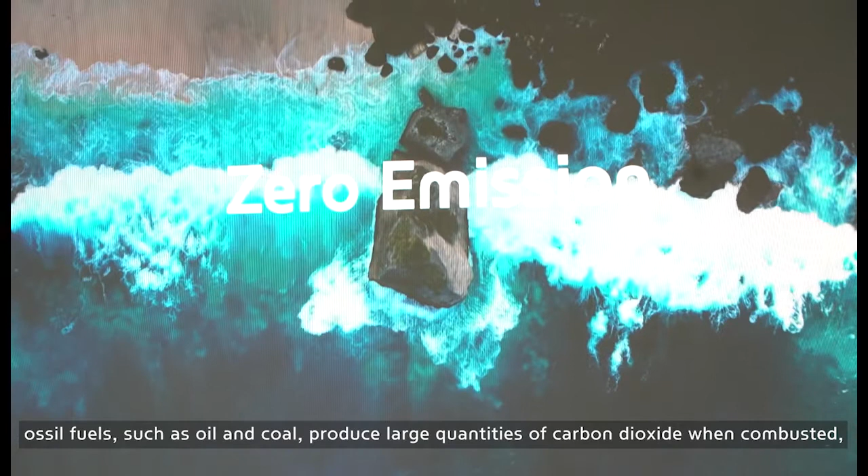For starters, hydrogen is eco-friendly. Fossil fuels such as oil and coal produce large quantities of carbon dioxide when combusted, which contributes to global warming. But hydrogen makes water when combined with oxygen. There is no emissions, and therefore no pollution involved in the process.

Also, it saves a lot of money. Hydrogen trains can operate without overhead power cables, so you can save costs associated with building and maintaining power supply infrastructure.

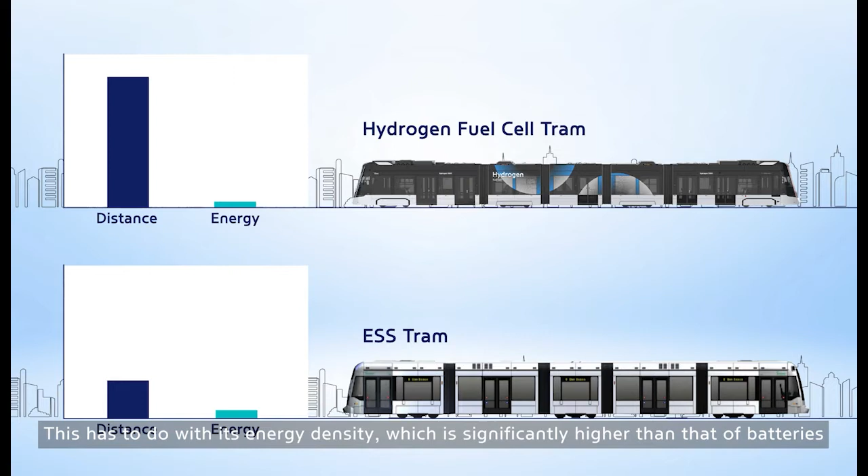In addition, hydrogen is an energy source that can be used in a long-term and large scale. This has to do with its energy density, which is significantly higher than that of batteries. In fact, hydrogen is the only viable option for the rail industry, which requires an independent energy source for high volume movements over a long period of time.

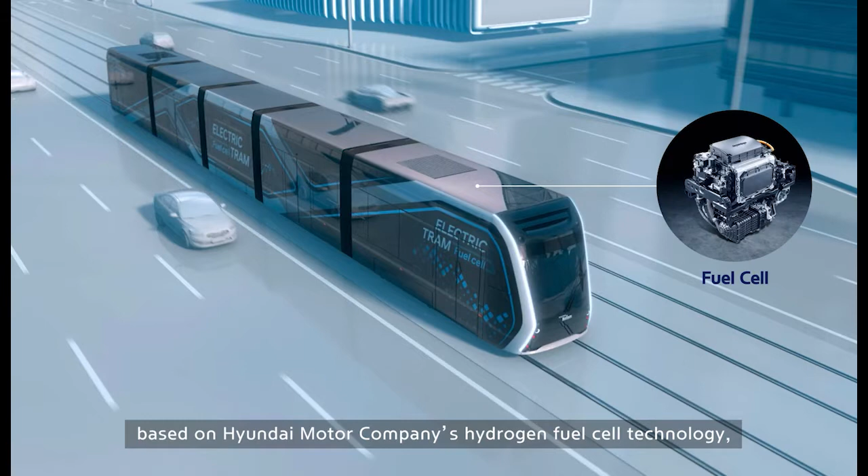Driven by this benefit and the green energy trend, countries with advanced rail systems are rushing to introduce hydrogen trains. Against this background, in January 2019, Hyundai Rotem took on a new challenge to usher in a so-called hydrogen society. We developed a hybrid fuel cell battery combination based on Hyundai Motor Company's hydrogen fuel cell technologies. We installed this system on a prototype tram to demonstrate its feasibility and had its performance verified through a driving test.

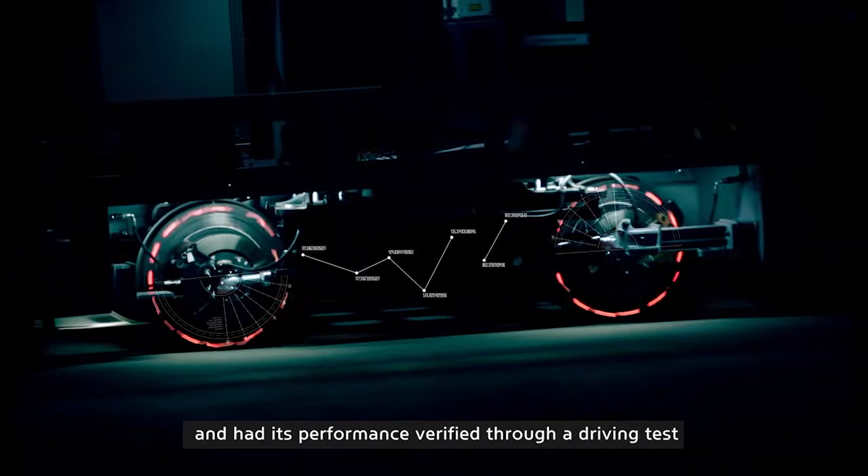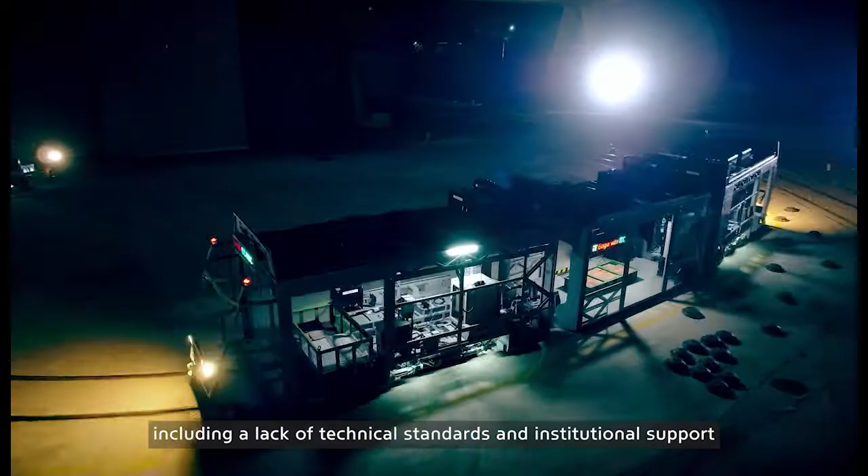At the earlier stage of development, we faced several challenges, including a lack of technical standards and institutional support. This was followed by a multitude of trials and errors. But backed by a special initiative of the Korean government, we were finally able to complete a successful test in March 2021.

In July 2021, we built on this experience to launch a new project aimed at developing a production-ready hydrogen train. Funded by the Korean Ministry of Trade, Industry and Energy, this ongoing R&D project is a joint effort of 21 leading companies and research institutes in hydrogen technology in Korea.

It is also joined by a municipal government looking to introduce a hydrogen tram service. This means the technology can be easily translated into a real-life application once we finish testing it on demonstration lines. This project has an ambitious goal to produce a production-ready model at the end of 2023. Korean researchers are strongly committed to making this goal a reality. So, we will be able to see hydrogen trams running through the streets of Korea by the end of 2023.

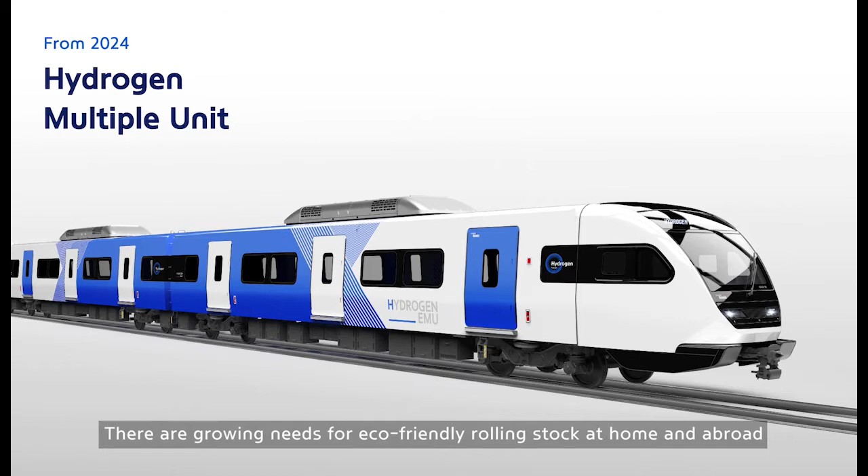We are also involved in the development of key technologies for hydrogen locomotives as a follow-up to the hydrogen tram. There are growing needs for eco-friendly rolling stock at home and abroad. We intend to develop concept designs for hydrogen rail cars, locomotives, and high-speed trains to cater to these future demands. From 2024 onward, we'll start diversifying our lineup of hydrogen vehicles.

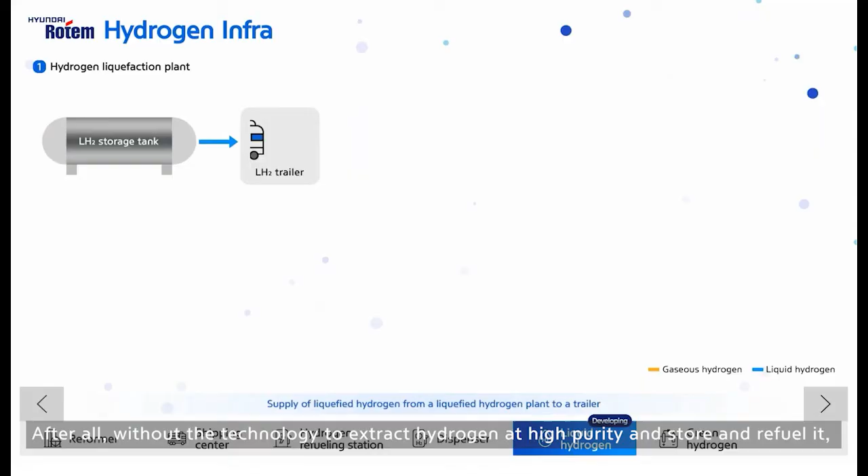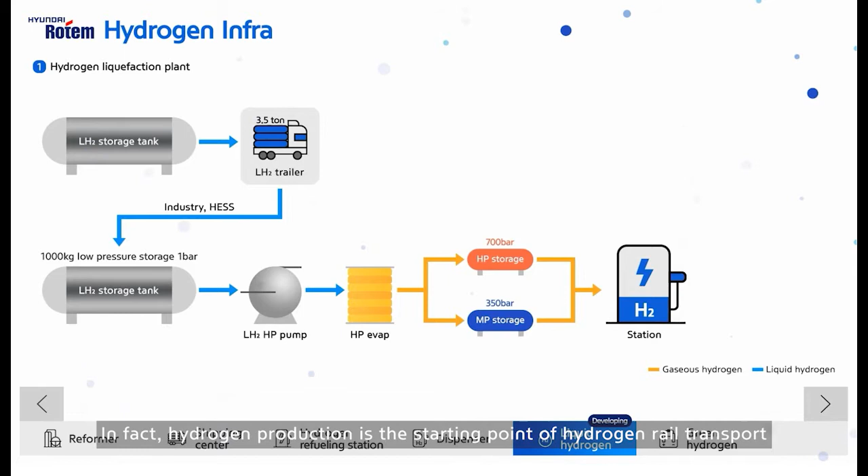Now, when it comes to hydrogen trains, you can't forget about hydrogen production and refueling technologies. After all, without the technologies to extract hydrogen at high purity and store and refuel it, hydrogen trains simply can't run. In fact, hydrogen production is the starting point of hydrogen rail transport and an enabling technology for a zero-carbon hydrogen society.

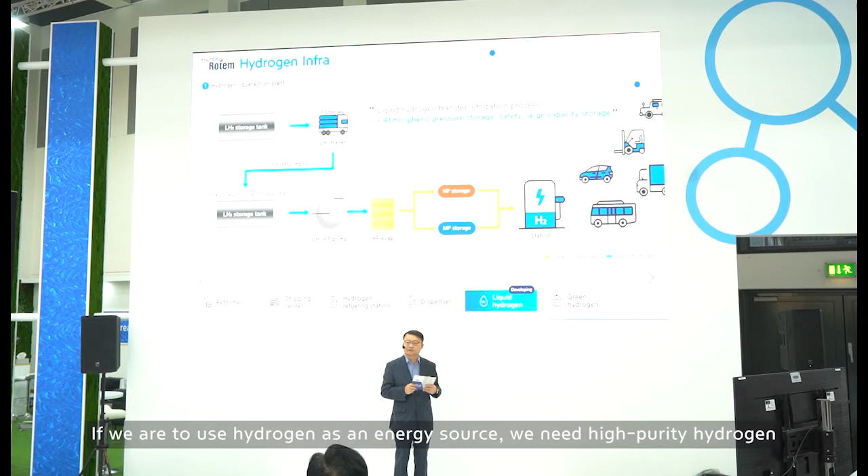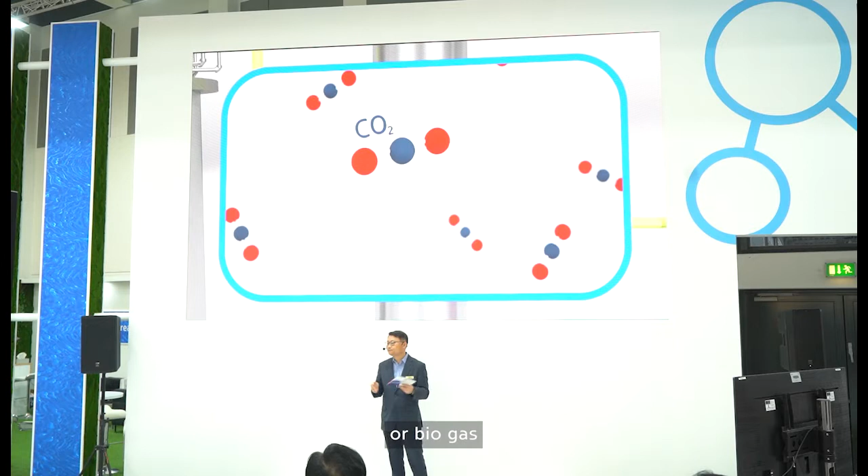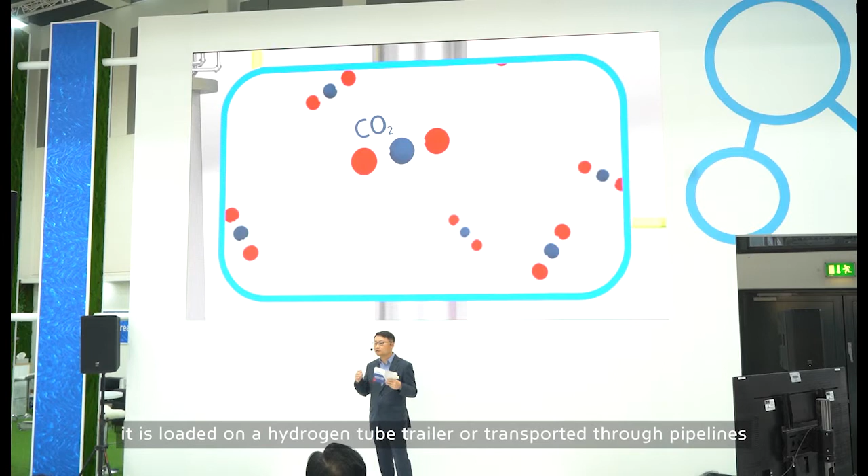If we are to use hydrogen as an energy source, we need high-purity hydrogen. Hyundai Rotem possesses a technology to extract high-purity hydrogen from natural gas or biogas. Once hydrogen is produced from byproduct gas, it is loaded on a hydrogen tube trailer or transported through pipelines for delivery to hydrogen refueling stations. The use of byproduct hydrogen as an energy source that would otherwise be discarded is environmentally friendly. This is also expected to help increase the supply of hydrogen.

At this point, we would like to walk you through our flagship hydrogen project. First, allow me to introduce our senior researcher, Mr. Shin Park, who will shed light on the hydrogen tram.

Hello everyone, it's really great to be here. My name is Shin Park and I'm responsible for the development of the hydrogen power train. You can see this commercial model on display over there.

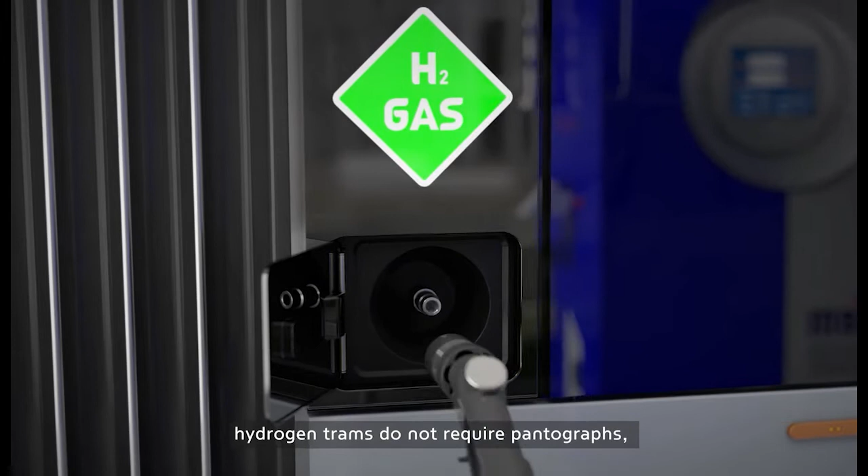Hydrogen trains are powered in the same way as a conventional electric train. The only difference is that hydrogen trams do not require pantographs and overhead catenary wires, because electric energy is generated on board by hydrogen fuel cells. Hydrogen fuel cells generate electricity and water through a chemical reaction between hydrogen stored in an on-board tank and oxygen in the air. Okay, let's forget about all those fancy chemical formulas for a second here.

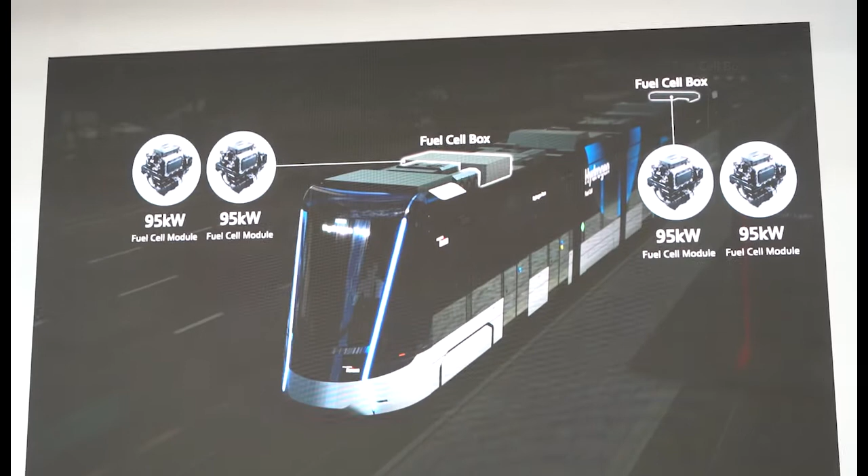In addition, air in the atmosphere passes through a filter, leaving particulate matter behind. This purifying feature alone is environmentally friendly. And what's more, hydrogen fuel cells emit water and zero carbon dioxide, which explains why hydrogen trams are the ultimate green means of transport.

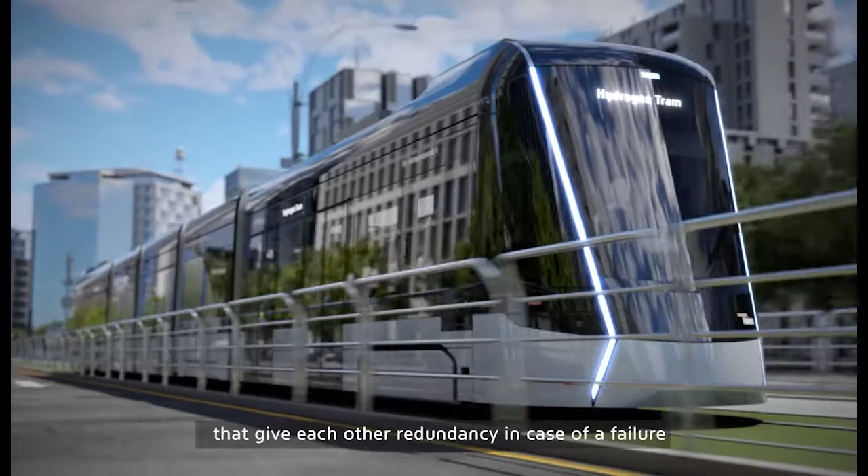One train set would have 4 95-kilowatt hydrogen fuel cells. 2 of them will be installed at both ends of the train, and battery packs with high power charge and discharge capability placed in the middle module. So, in total, we would have 2 different power sources that give each other redundancy in case of a failure.

When starting, the train will be powered by the hydrogen fuel cell, and as it accelerates, the battery will work as a parallel power source to produce the needed electric energy. And when brakes are applied, the energy generated by the traction motor is stored in the battery for energy recycling.

Also, there are 4 PMSM traction motors at each end of the train, meaning we have a total of 8 high output, high efficiency traction motors. Thanks to this robust power system, our train can travel up to 150 kilometers on a single charging. I hope this gave you a better understanding of our hydrogen train.

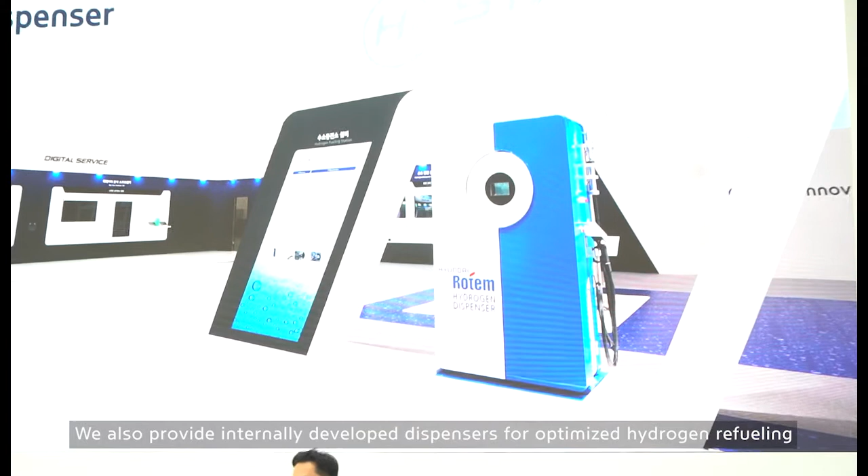As you can see, HYUNDAI ROTEM offers a full range of integrated solutions for hydrogen rail, from large-scale production of quality hydrogen and its safe distribution to refueling stations, to rail vehicles powered by hydrogen.

In terms of hydrogen infrastructure, besides the refueling solutions that I just covered, we are also exploring new possibilities in green hydrogen, including a hydrogen liquefaction system to ensure large-scale storage and improved transport efficiency, as well as a solar-powered water electrolysis system. Well, that's it for my part.

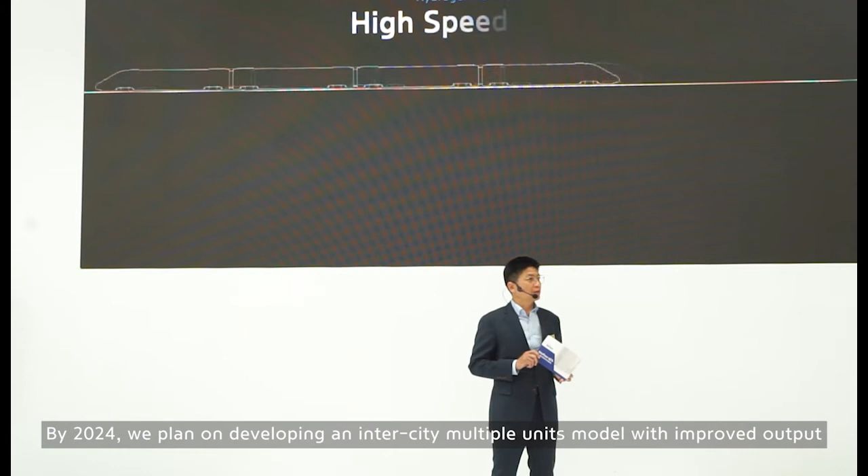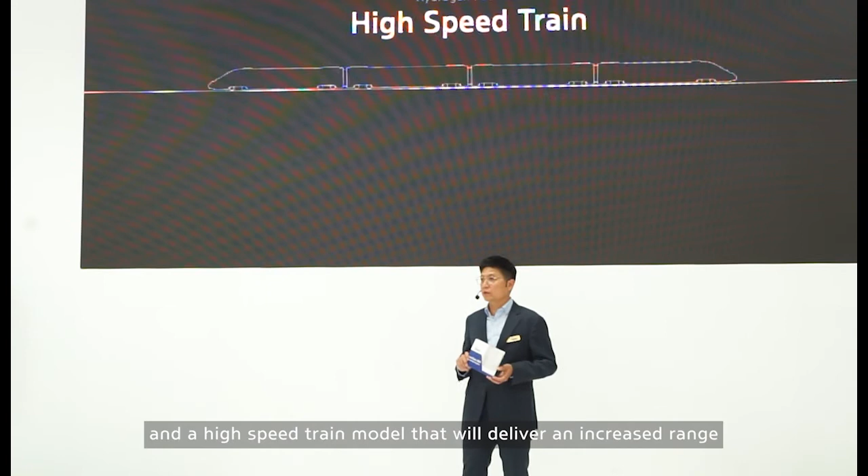By 2024, we plan on developing an intercity multiple units model with improved output and increased hydrogen payloads. By 2030, we will unveil a locomotive model and a high-speed train model that will deliver an increased range based on high-power fuel cell technology.

Achieving net zero is a global imperative, and we, as the global rail community, have a responsibility to deliver innovative, green, and emission-free rail transport solutions, including those based on hydrogen.